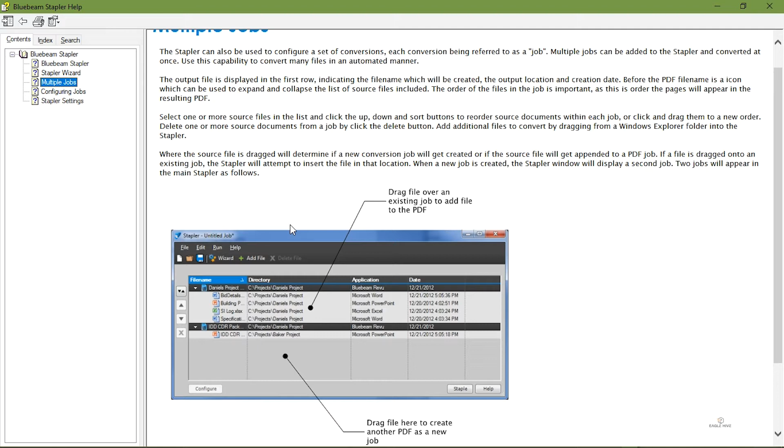You can do multiple projects, so exporting multiple projects, and it's quite helpful when you have different types of projects. So without further ado, let's combine the projects that we're working with today. So today we're working with the roof plan, the floor plan, and the ground floor.

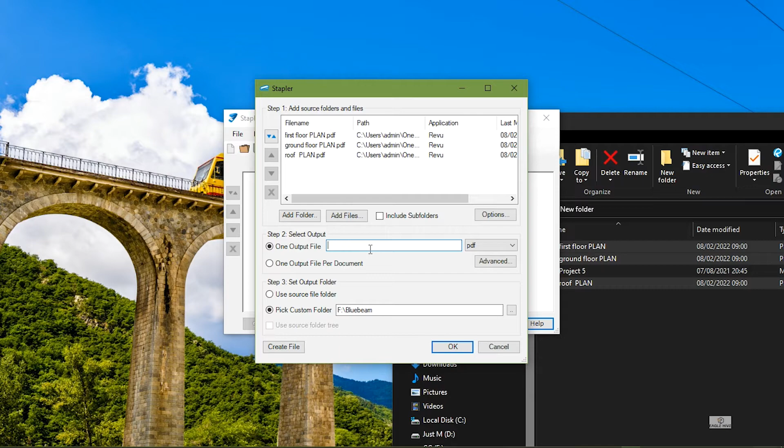So just drag and drop, come here, select one output file, and I want it to be a PDF. You have all these other options, then I want it to be saved in the Bluebeam folder. And now it will be opened in the official software, the Bluebeam software.

So here we have the drawings. They're now in one combined PDF, like so. Although the scale is not set, it's not calibrated. So it's so easy to set the scale in Bluebeam or to calibrate. So just zoom in to your drawing, hold the control button and the mouse wheel, zoom it in.

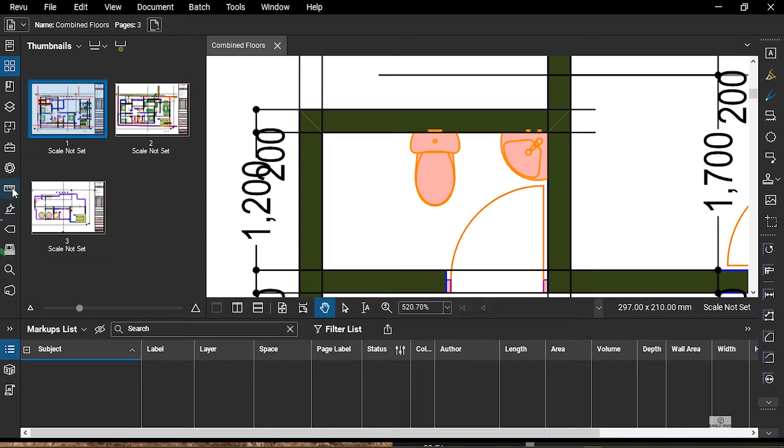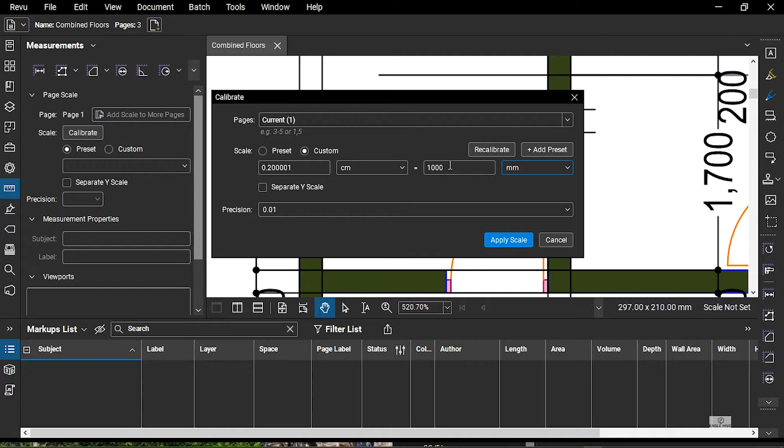Then come here to this measurements tool, go to calibrate, then specify the distance that you want from here. Hold down the shift button to have it in ortho mode to here, and that's 200, yeah. So it senses it's in centimeters, and we usually work with millimeters for precision. So say 200 millimeters, precision is to 1 when working in millimeters.

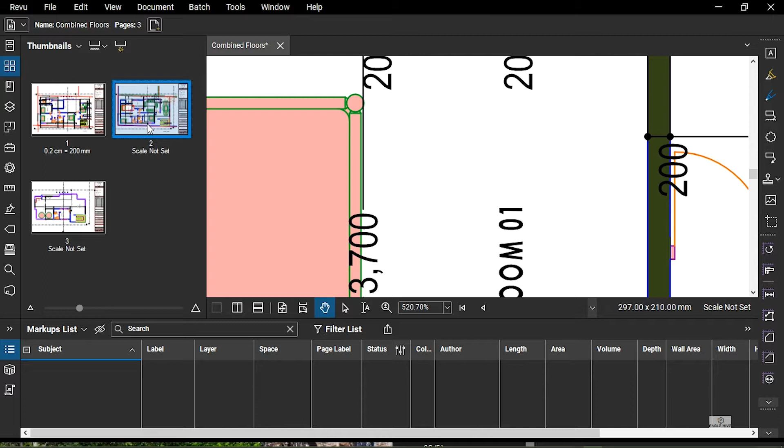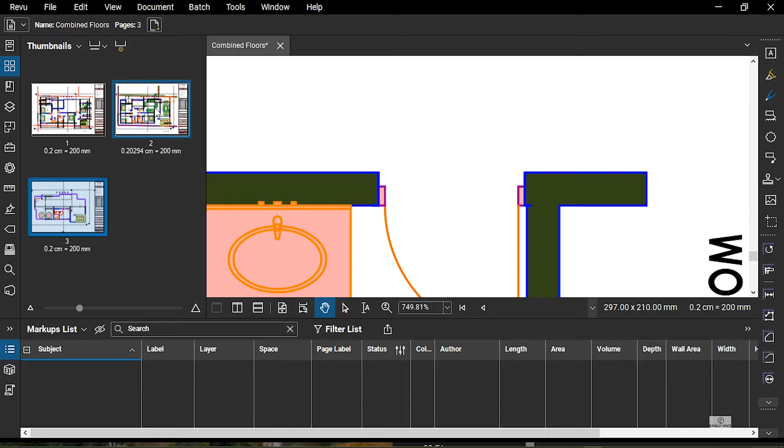So hit apply. So for now, just hit escape, click on this, and we have already set the scale for this drawing. So let's do the same for this one. We have all of them set to scale. So this one is a bit different. If it's that different, you can just come back here again and calibrate again. So from here to here, 200, and hit apply. So now the scale is all even.

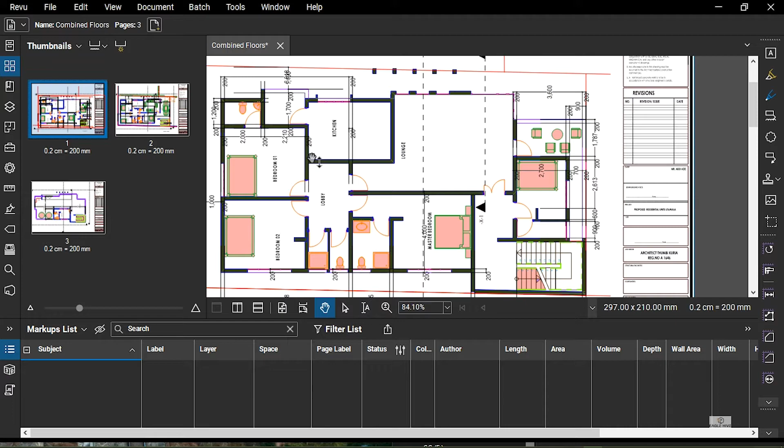So in Bluebeam, you can easily analyze PDFs. So I'll show you how we're going to analyze this one. This is the first floor. So you can just come like this, just drag like that. So first floor, you can change the color to any color that you want. For example, I want to work with green for that one.

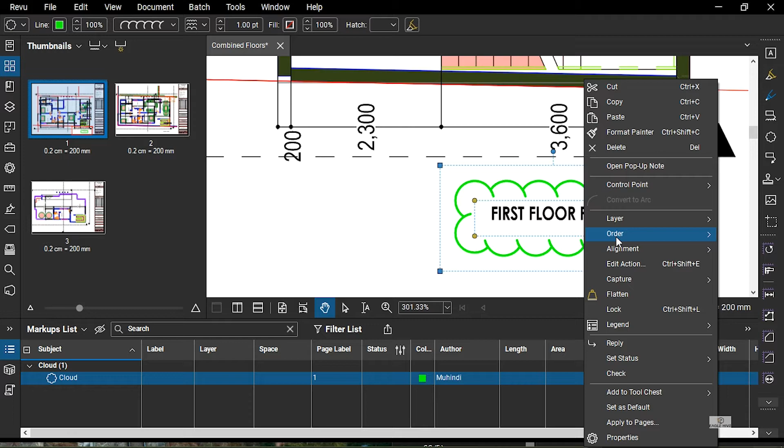The name is written here. You can add it to a layer by itself, so you can turn off layers and be left with this one. Okay, so you come here, then add a new layer, for example blue B layer, or just blue B, like that. Okay, so now this is a new layer like that. So zoom out. So let's start analyzing the PDF.

So for this one, we need the annotations of the rooms from the architect. So we can use this command for callout, or this one for a cloud. Okay, so you can use that, or you can use this. So you can start with this. So just draw a rectangle around the room like that, and then just go for a callout.

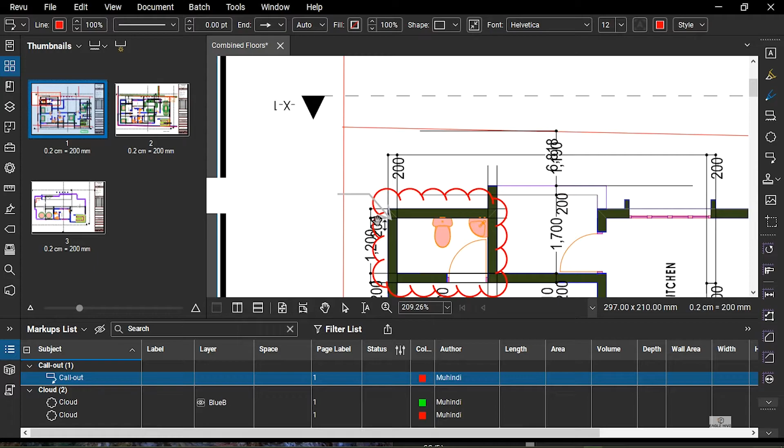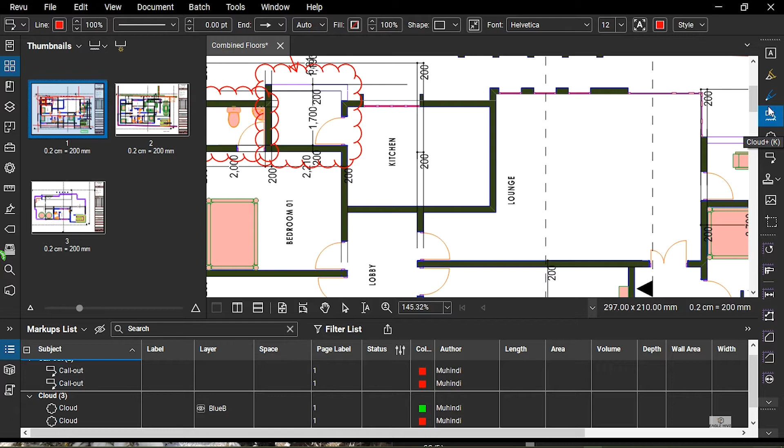So like that. So we write what's the room name, and also this, what's this. Okay, so we already know this as an engineer. This is a water closet, but it's important for annotation. For documentation, it's very important. The same for this one. What is this? But this is okay. For this room, we don't have this dimension. Okay, so just use this command and from here to here.

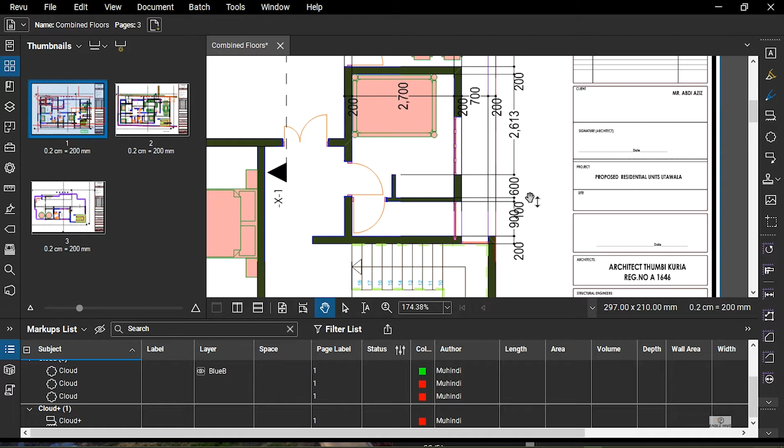Okay, let's say dimension. Hit on escape. So for this project, we don't have the overall dimensions. Also the neatness, the alignment for the dimensions, it's not well done.

Just back here. So control undo. Click on this. Click your left mouse button. Don't release it. Drag your mouse and then release it to the end. Then come here, specify.

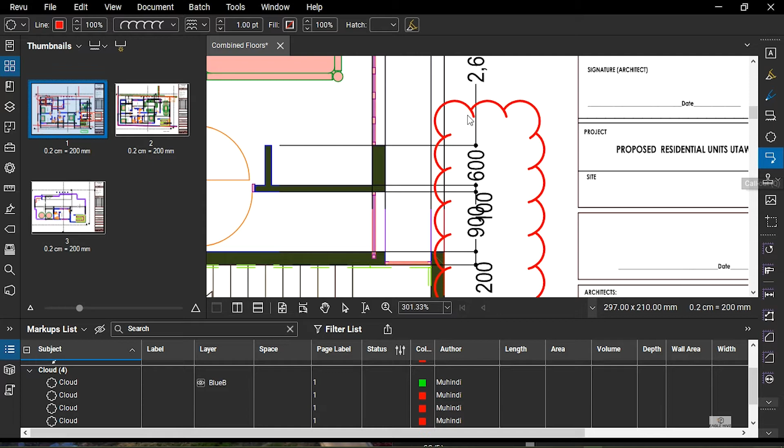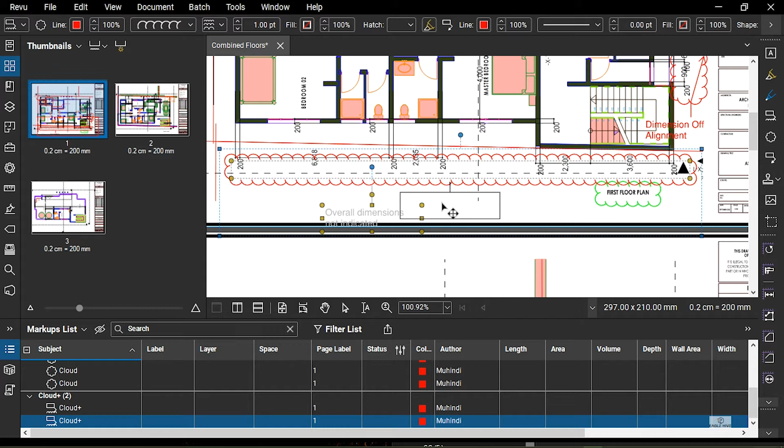We also don't have the overall dimensions, so that is something very key. You can just click on the text and drag it like that up to there. So let's now go to the next one. So this is a ground floor plan. Okay, so back, that's the ground floor, and this is the first floor.

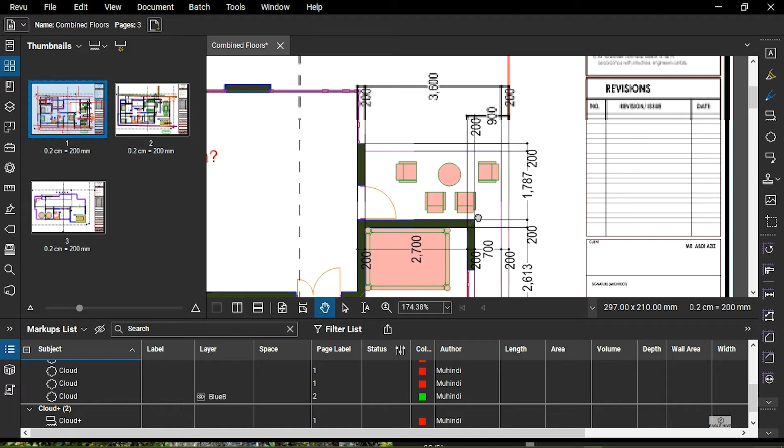So for first floor, I can see the wall here. I've seen the annotation 200, although the hatch is not well done. So for the clarity of the project, make sure the hatch is done. Yeah.

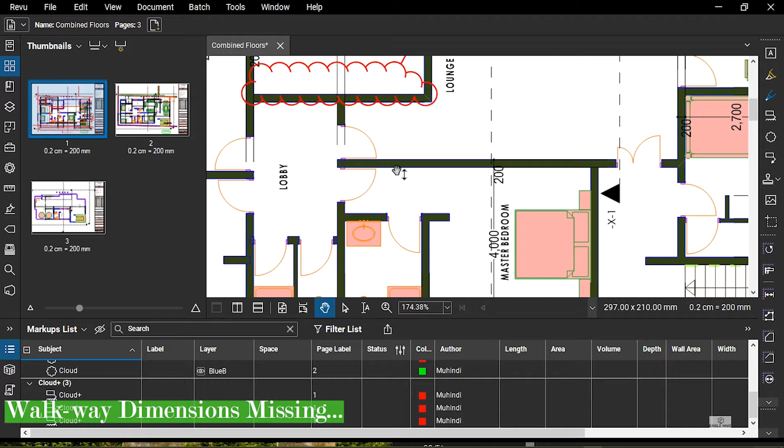Then something very crucial, there is no dimension for the walkway. That is very crucial. So for us, if you need to know the dimension, just come here to measurements and length over here. Then you can just measure. Maybe the door span is 900, the opening. The walkway space is 1200 millimeters. The space between this side.

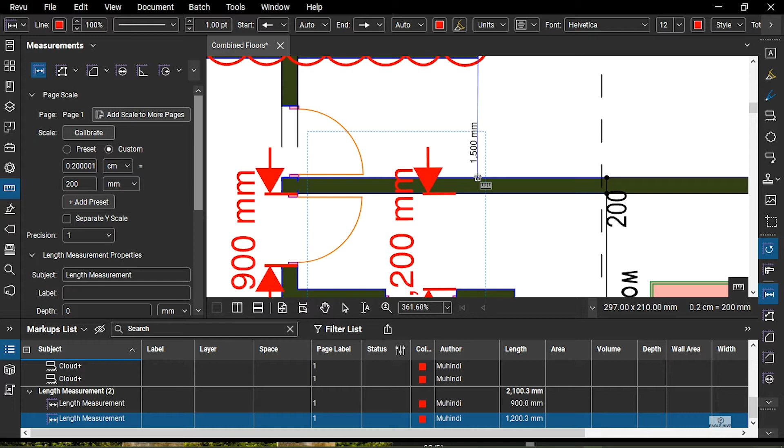So if you want to zoom in, hold on the control and then zoom in with your wheel mouse button. If you want it ortho, hold on the shift, then click, and there we have it, like that. So at least now we can see the dimensions, although they are not annotated. Very important, but there is none.

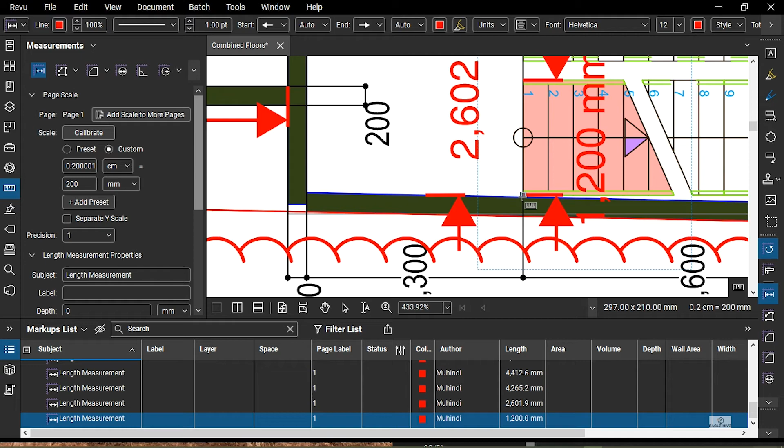So it means how big is one flight? 1200. Okay, it's very important to annotate this here. Even the landing space, 1200. I usually advocate for the landing to be bigger than the flight, because here is where you turn.

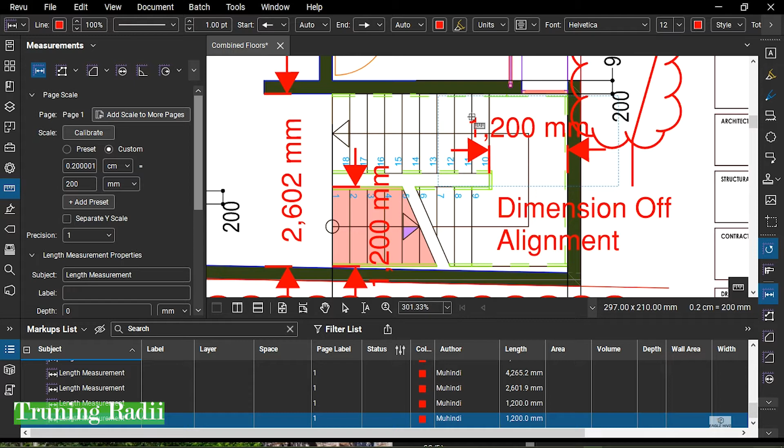When you're carrying heavy material or a long material, here is where you take the turn. So it's advocated for this region to be bigger than this other region. And also, how long is it? So instead of dragging, actually you use this circle, the yellow circle, and drag it below. So at least I can see they had annotated this one and it's correct.

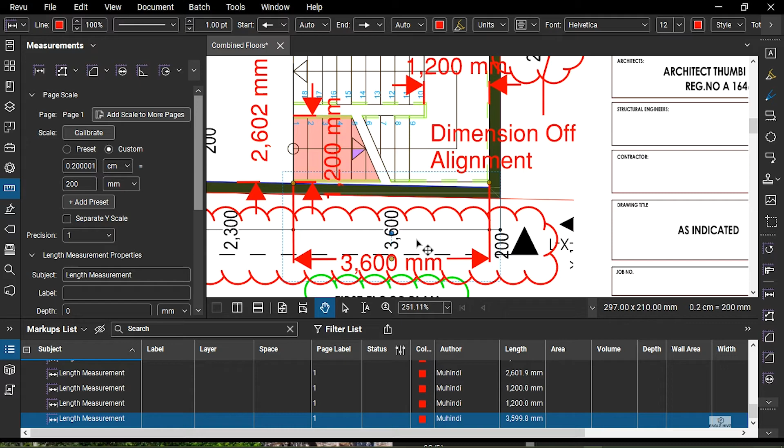Yeah, there we have it. Also this room, what is this room? So this is very important here. So you can specify for the length to be a different color, for the clouds to be a different color, for the colors to be a different color. So you can arrange by the color, by the author, by the length. So for the callout, you can specify them to be a different color. So let's

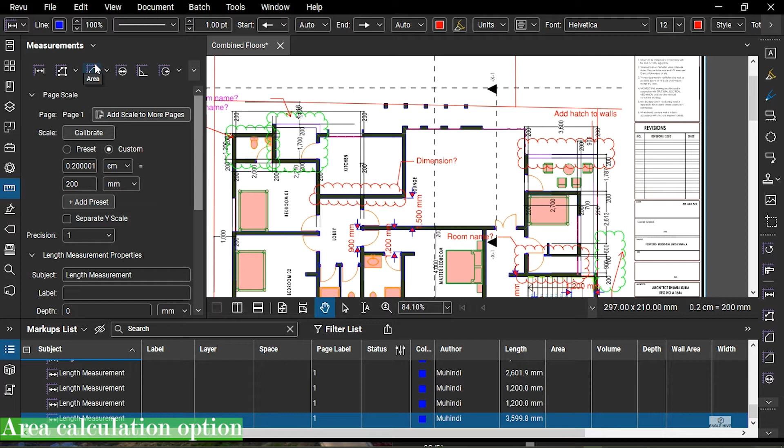There's an option for the area here. Just come click on area, then specify the corners. So right now we have the area. This is very important when actually dealing with things like tiles. So we can change maybe to dark green, although we also have an option for the area over here. So we can give it a label like living lounge area.

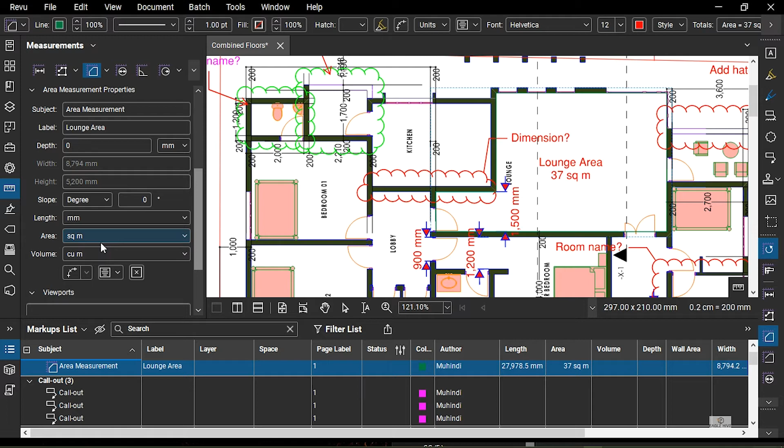You can have a different depth. There can be a slope. You can change the units that you want for the area, the volume if need be, and then you can show what to be shown there. Yeah. By introduction of the depth is where you get the 3D aspect, and with volume there's a possibility for the calculation of the volume. Okay. You can even change the font if you need to over here, and add a hatch for the area.

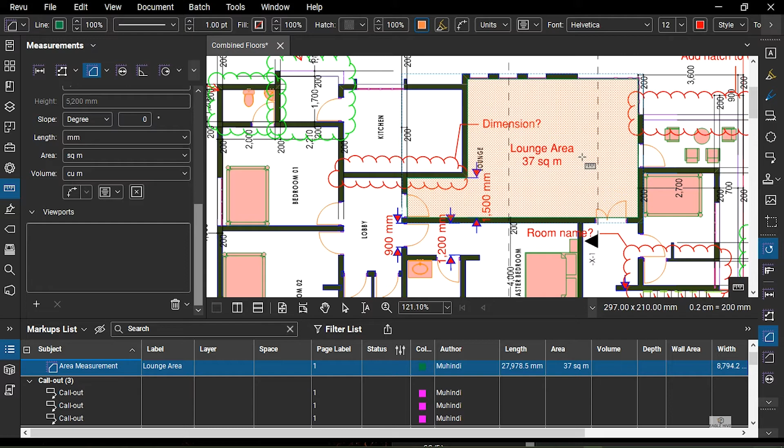For the first floor, it's already done. Now let's check the ground floor. It's already done. I already checked it. So this is the roof floor, although not indicated. We just come back here.

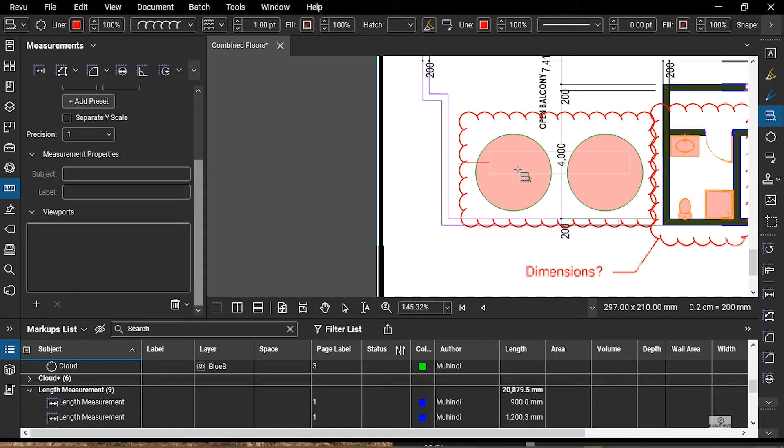Dimensions are very important, actually for quantity takeoff and material takeoff, extremely important. So what are these? Are these tanks? In engineering, we never make assumptions. If they are tanks, they should be annotated with the size of the tanks, the liters of the tanks. Never make assumptions.

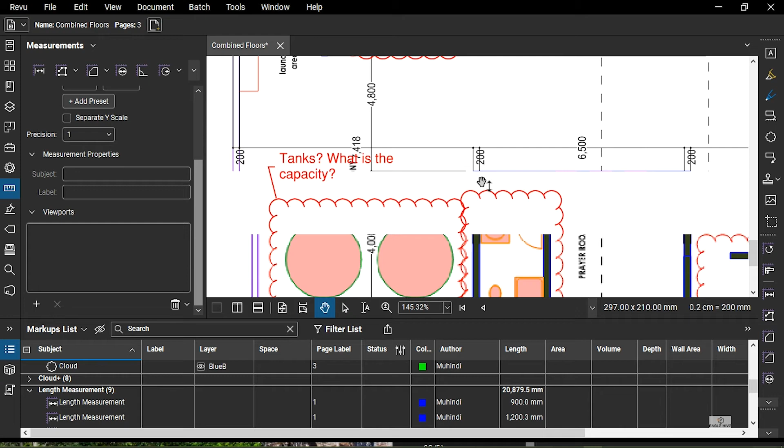These are very crucial things that should be annotated. So the laundry area, what are these? What are these over here? What else is here? So this is an open balcony, it lands here, this is open.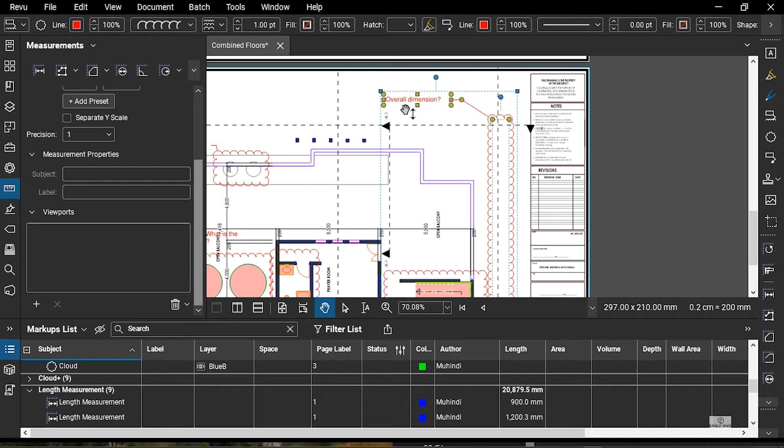Okay, this is a prayer room. That's good, that's good. Although still no overall dimensions, which is very crucial. We don't know the size of this structure, we don't know how long it's spanning. So what is the overall dimension? Crucial, extremely crucial.

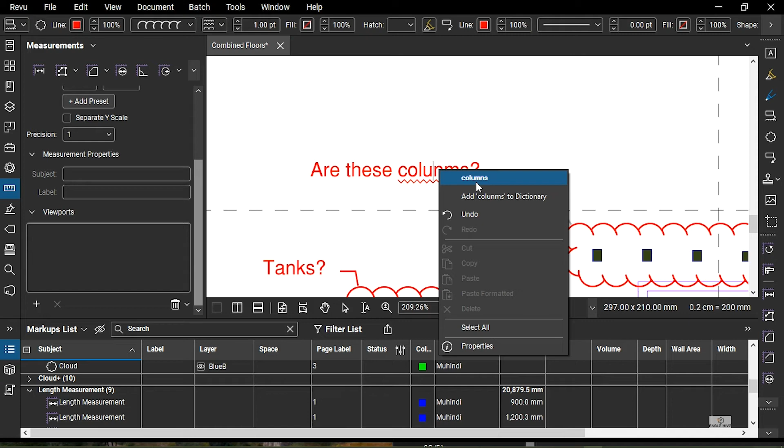What else? What are these? These columns. Never assume. So automatically it has a dictionary, so it writes like so. So this is the power of Bluebeam, yeah.

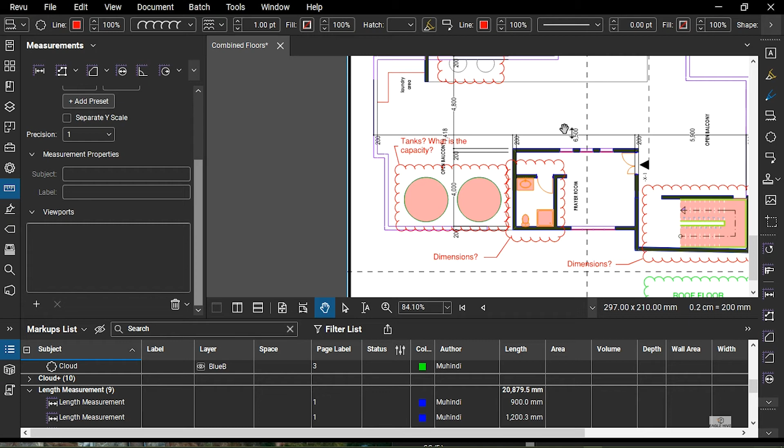So windows, the door is here, one entry, windows over here, no windows here. And then for water tanks, it's always advised by the national government that water tanks should be - don't quote me on this - but they should be restricted from easy access by anyone, because these are water tanks. This is what gives water to the whole building, and if there's a malicious person, if they access these water tanks, it can be quite something.

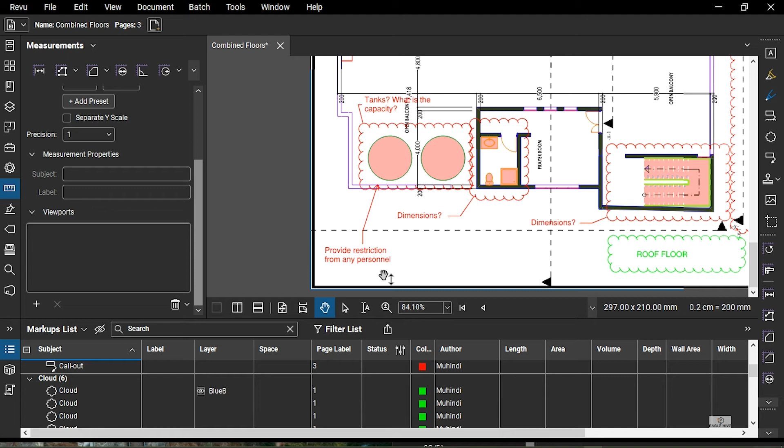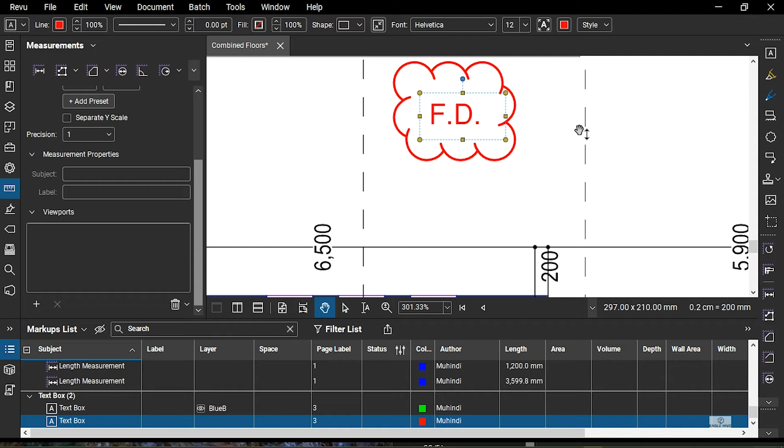So provide - so it's important, it's already there. So I presume the hanging lines will be here. So it's important for them to know that they should have a floor drain, an FD. So this is basically a provision for plumbing services where water is moved between a floor to the other floor and to a manhole to the ground floor.

The manholes are usually located outside the building. If you have a structure like this, the manholes will be somewhere here depending on the location of the water closets. So if the locations of the water closets are on this side, like for our case, the manholes should be provided. I presume this is a water closet, but not annotated. This is a water closet, so the manholes will be around here because also the kitchen is here, and all the water should flow to that manhole and then be directed to the septic.

I presume this is a septic. I'm not sure, but never make assumptions, yeah?

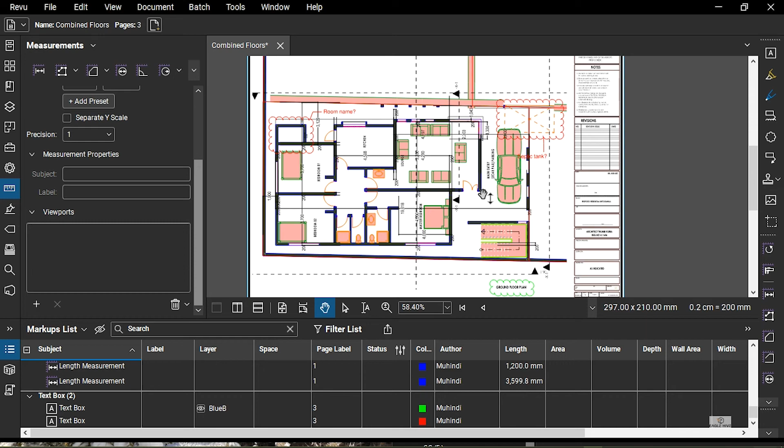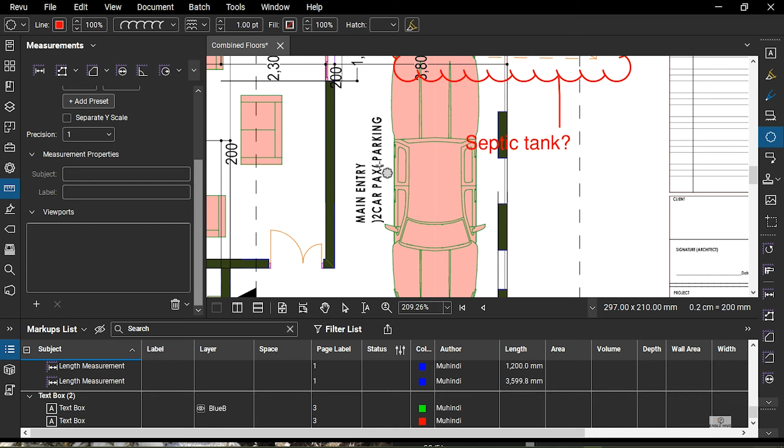So also for the parking, I think this is a ground floor. Always provide a floor drain also, because when you're washing your car or washing this room, or if water was to flow into this region, you should have a drain for this place, yeah? So you just provide a floor drain, an FD.

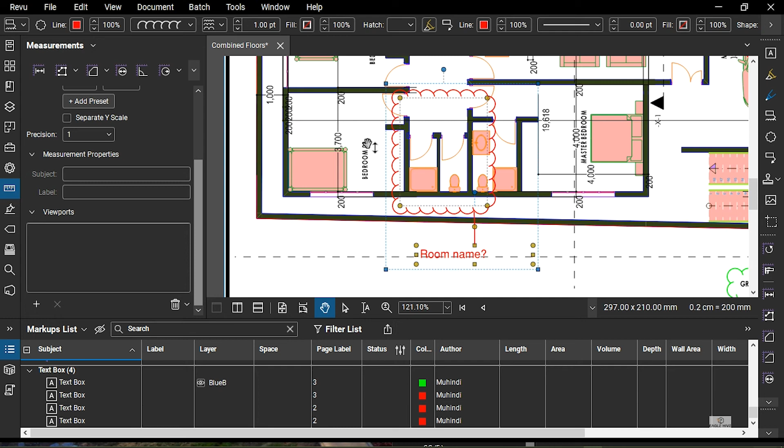So let me just annotate here. Let me not assume they know what a WC is. I do know it's a water closet, but it should be annotated for the client, for anyone, for records, yeah? Very important, the dimensions should always be indicated. So it's written this is 4 meters, so let's confirm from our end.

Okay, so for this one, it's okay, it's okay. So I can just save it. There are some things I might have not seen but have not indicated.

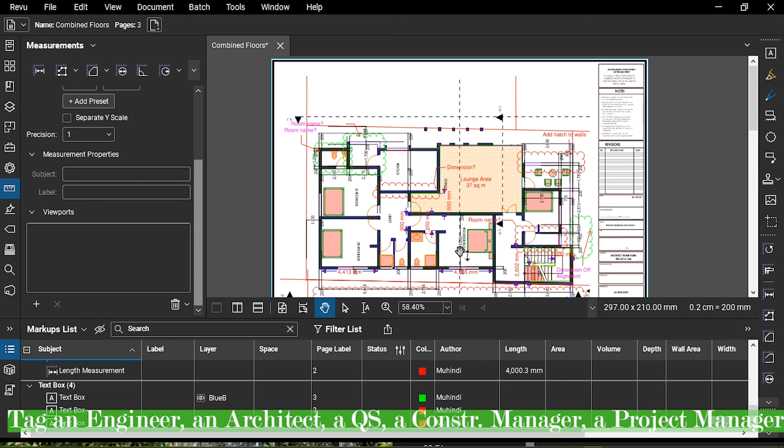Thank you, so let's just save. It's already saved, and now we can just close the project.

So we can either print it. If we had an external printer, you could print it, or you can just print it in Bluebeam PDF. You can actually change the size of the paper that you want. For this paper, it was given in international standard A4. I'm going to leave it as A4, and you can just have a brief overview on how the paper looks like. So that's the way it looks like, and that's it. Yeah.